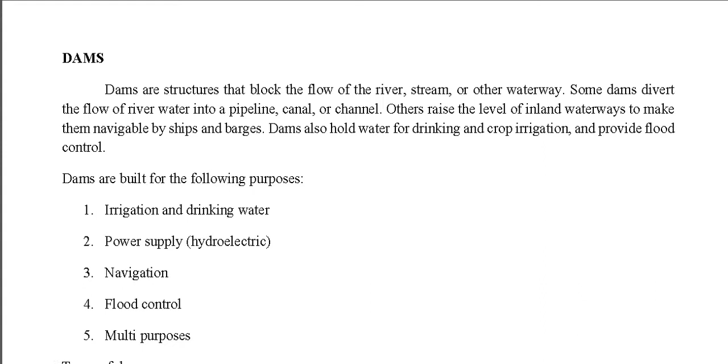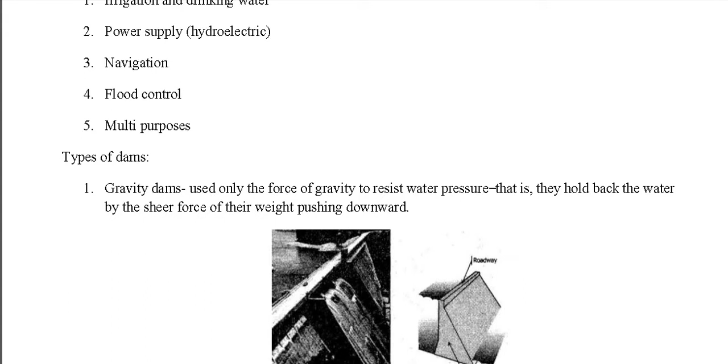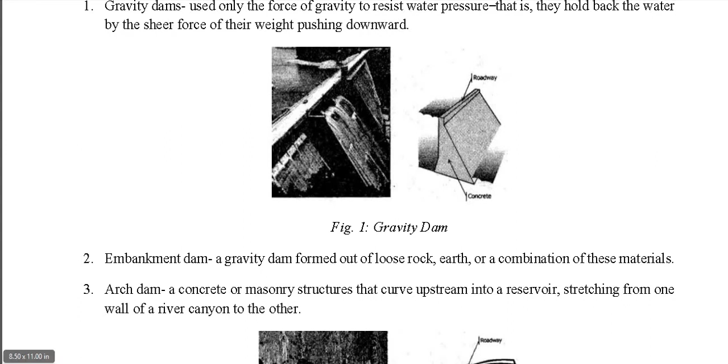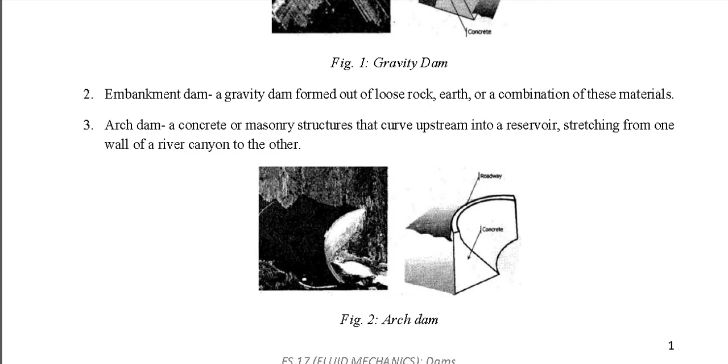So next, let's see these different types of dams. Well, I will not be elaborating more about these types of dams because yung concern lang natin dito is how to analyze problems concerning dams. So in your handouts, or in this video, as you can see, there is the gravity dam, embankment dam, arch dam, at saka yung buttress dam. But in our analysis, we will be dealing more with the analysis of gravity dams, okay?

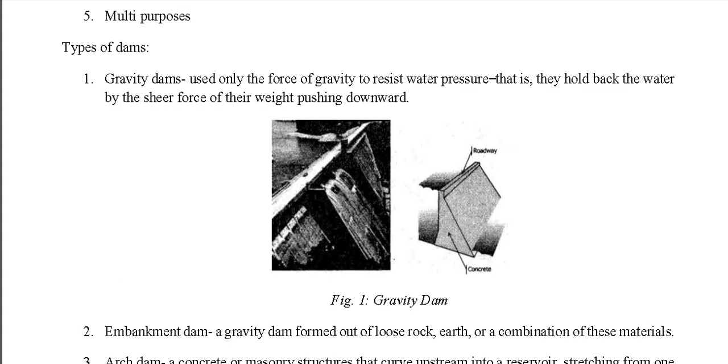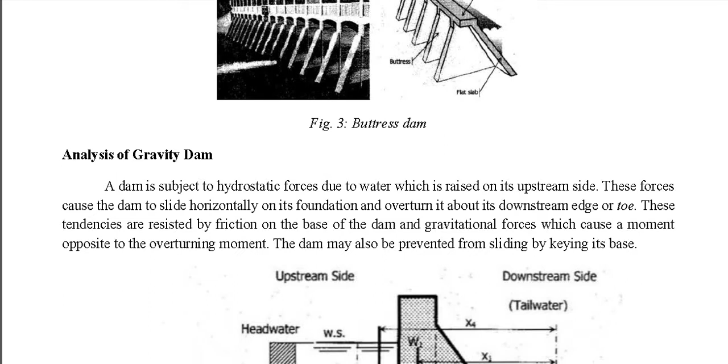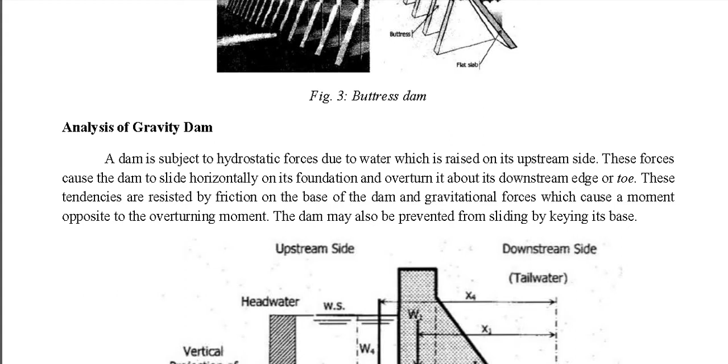So please open the next page of your handout. Here is the analysis of gravity dam. So a dam is subject to hydrostatic forces due to water which is raised on its upstream side. As we all know, dams contain water, right? So when there is water, there is also pressure. That pressure contains the hydrostatic force. So due to that hydrostatic force, water is being raised on its upstream side.

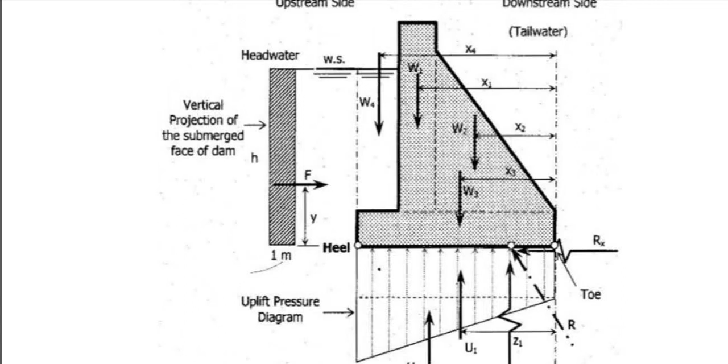As you can see in this sample figure of a dam, please see this cursor, this part is the uplift pressure diagram. Okay? Yan yung tinutukoy dito na upstream side. So these forces cause the dam to slide horizontally. This one is the hydrostatic force. Tapos on its foundation and overturn it about its downstream edge or toe.

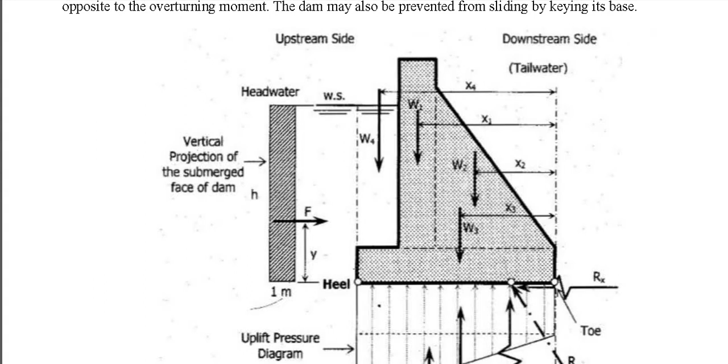So sa isang dam, may tinatawag tayong heel, at saka may tinatawag tayong toe. So as you can see, may dalawang parts yung dam: the heel and the toe. Please see this cursor, itong heel na ito kung saan directed yung water supply, at the same time, yung location ng water. On the other hand, yung toe nandito, sa opposite part. Okay? Please take note of these important parts ng dam because it plays a greater role in the analysis of dam.

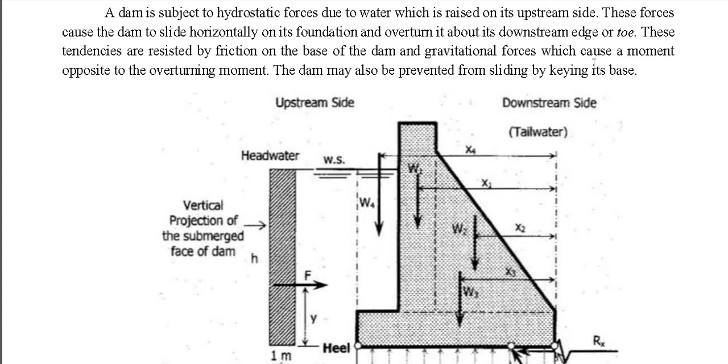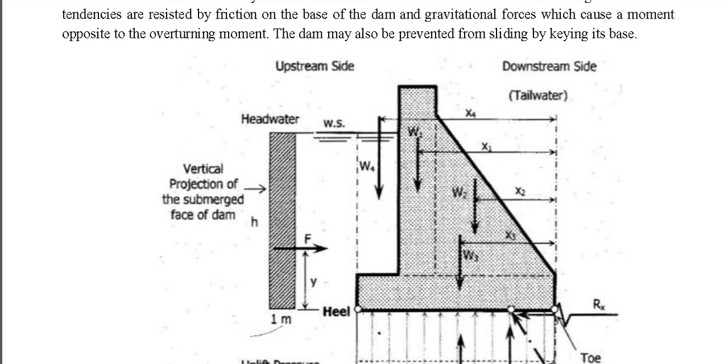So, these tendencies are resisted by friction on the base of the dam and gravitational forces which cause a moment opposite to the overturning moment. The dam may also be prevented from sliding by keying its base. So yun nga, yung pag-slide ng isang dam can be prevented by fixing the base to the ground.

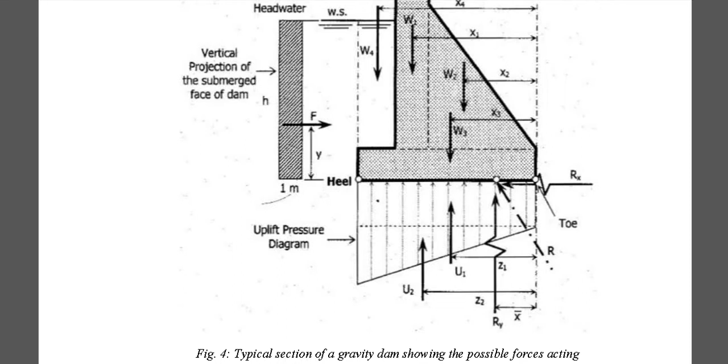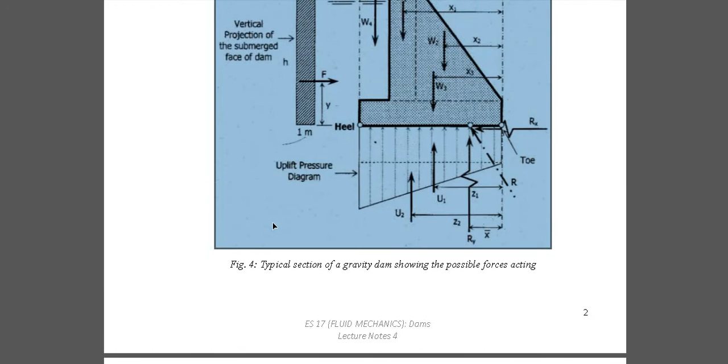So please refer to the figure that I have provided in page number 2 because that will play its part during the analysis of dam. As you can see, may F dito, may 1 meter unit length, and so forth. But to further understand, let's proceed to the steps of solution. So, with reference to figure 4, kaya nga sabi ko kanina, always refer to this figure 4. Kasi yan yung gagamitin natin for the analysis.

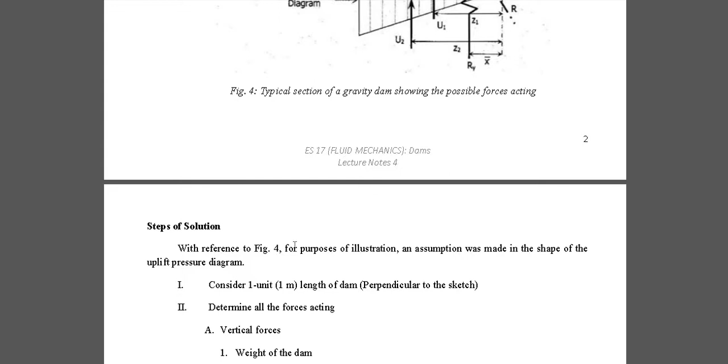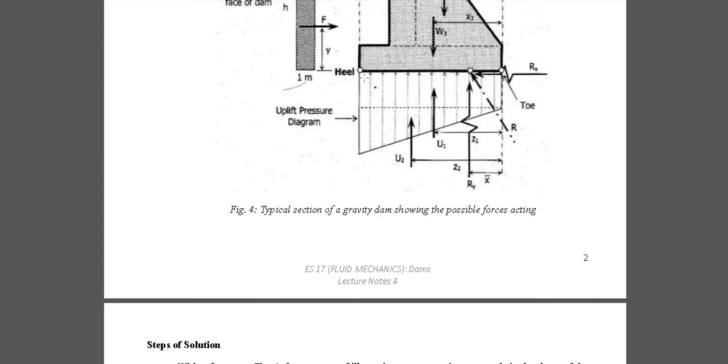So, with reference to figure 4, for purpose of illustration, an assumption was made in the shape of the uplift pressure diagram. Take note, class, sometimes sa isang problem, kung may indicated doon na may uplift pressure diagram, meaning to say, you have to analyze the problem na mayroong uplift pressure. Pero kapag walang indicated na uplift pressure, assume ninyo na walang uplift pressure, okay?

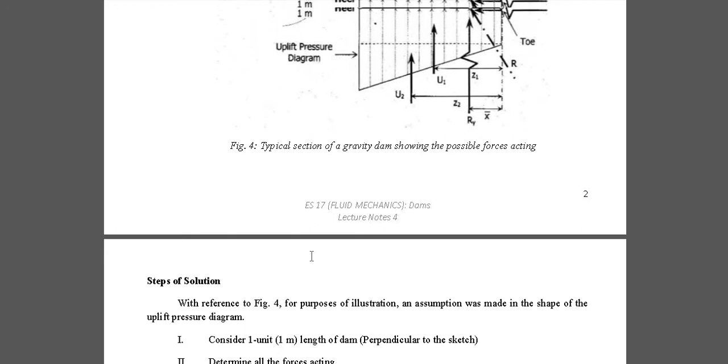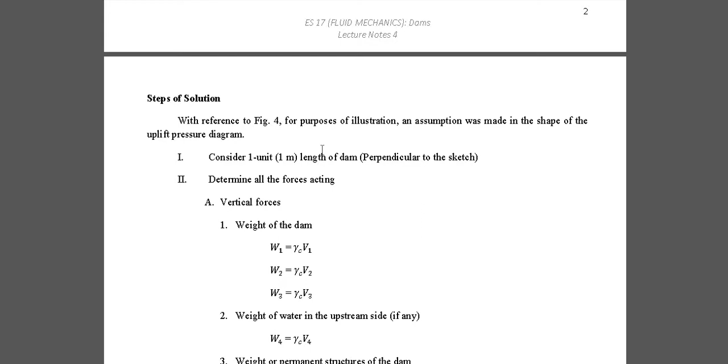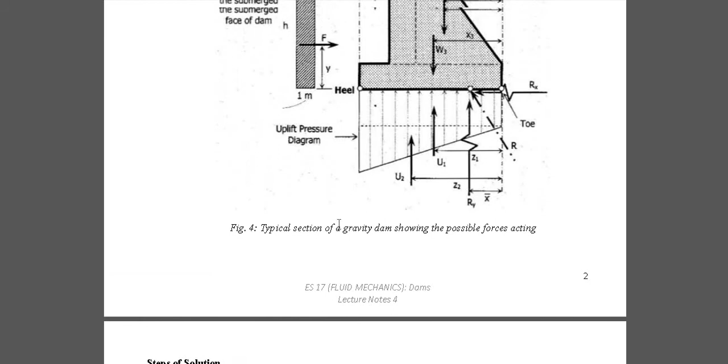So, whenever you are analyzing a problem containing a dam analysis, the following steps must be followed, para mapadali yung solving ninyo. So the first step would be to consider 1 unit, that is 1 meter length of dam perpendicular to the sketch. As you can see in this part, the very first step that you need to do is to assume a 1 meter strip or 1 unit length that is perpendicular to the sketch.

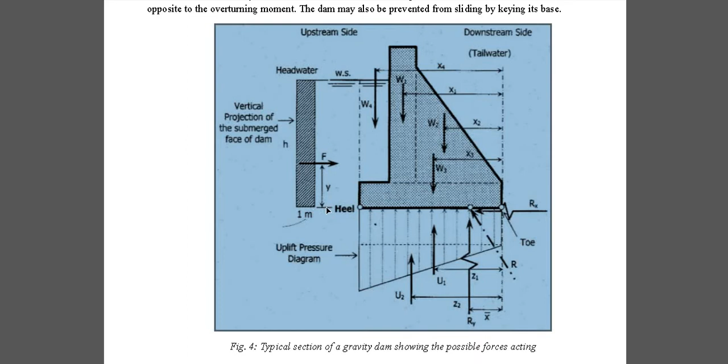As you can see in here, dito, sa dam na ito, this is the side part of the dam. Tapos, kung iproproject natin yung face of the dam, ito siya. Itong 1 meter strip. So, yan yung first step.

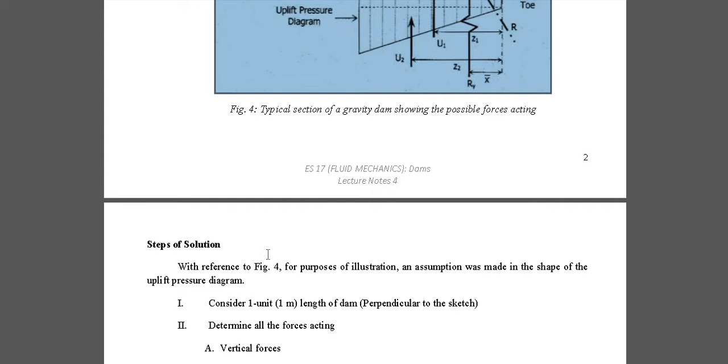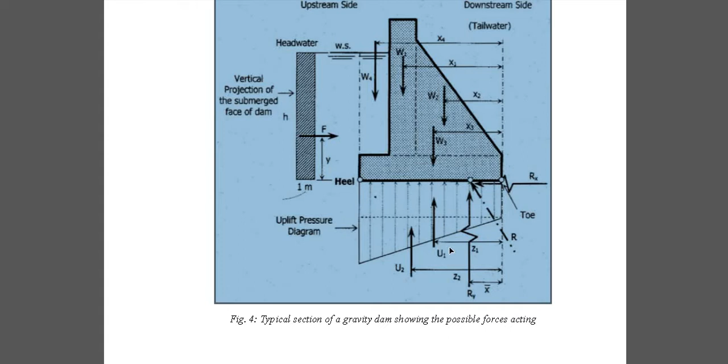Next, determine all the forces acting. After you consider, you assume the 1 unit length of a dam that is perpendicular to the sketch, the next thing that you need to do is to determine all the forces acting. You need to determine the vertical forces. That includes the weight of the water, the weight of the concrete, and saka yung uplift pressure diagram. I mean, uplift forces. After you determine all the vertical forces, you then again have to determine the horizontal forces.

Okay, let's go back sa vertical forces. Ito yung sabi ko kanina, yung weight of the dam, tapos weight of water in the upstream side. Take note, yung weight ng water na gina-consider dito is kung saan mayroong concrete na part. For example, this one, itong dito. This one, di ba may concrete dito? Since may concrete dito, at saka may tubig sa taas, yan lang yung weight ng water na i-consider natin.

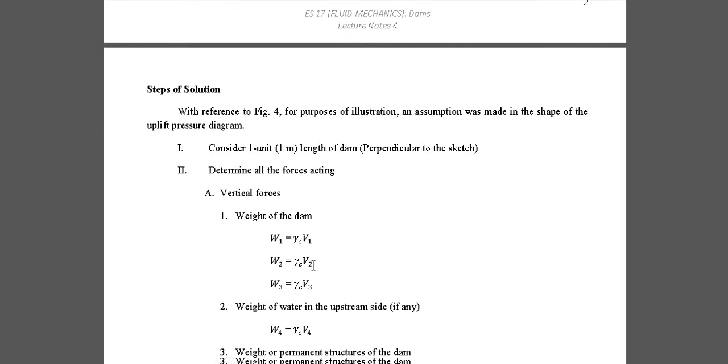Pero question, sir, what if wala tong part na ito? Meaning to say, wala kang weight of water na i-consider. Gets? So next, balik tayo sa vertical forces. Yung vertical forces, kasali na doon yung weight of the dam. Next, weight of water in the upstream side, yung sabi ko kanina. Next is the weight of permanent structures of the dam. And third or fourth, the hydrostatic uplift. Yun yung sabi ko kanina. Kapag walang indicated na solve the hydrostatic uplift, meaning to say, you just have to simply presume na walang hydrostatic uplift yung dam na yun.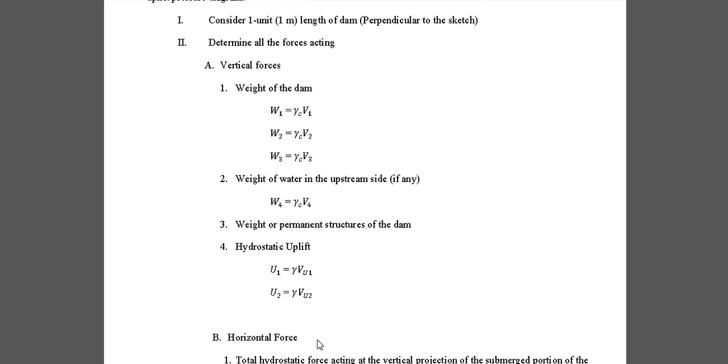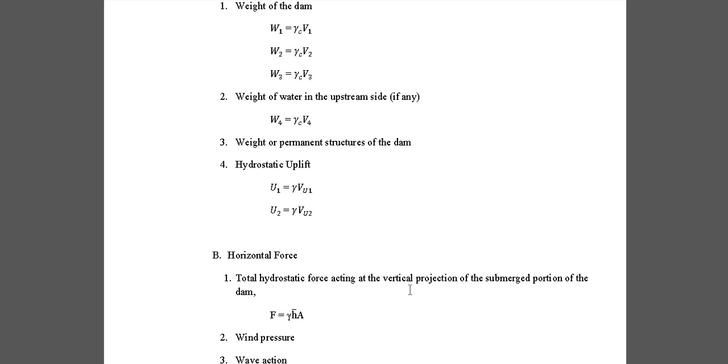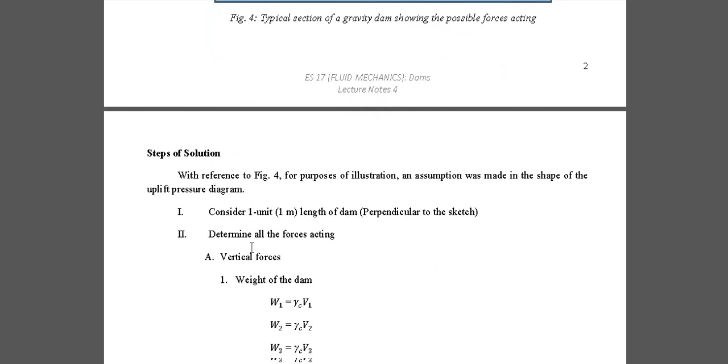So next, let's proceed to the hydrostatic or horizontal forces involved in a dam problem. So the first thing that you need to do is to determine the total hydrostatic force acting at the vertical projection of the submerged portion of the dam. So here, in this figure, sa figure number 4, you also need to determine the horizontal force acting on the face of the dam or the part of the dam in which it is submerged. Kung saan submerged lang. For example, this one. In this height h, sa height h na ito yung submerged na part. Since yan lang yung submerged na part, you have to analyze as well the hydrostatic force, the horizontal force in this submerged area.

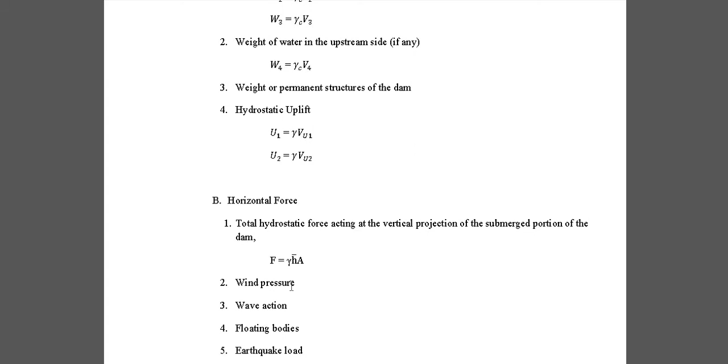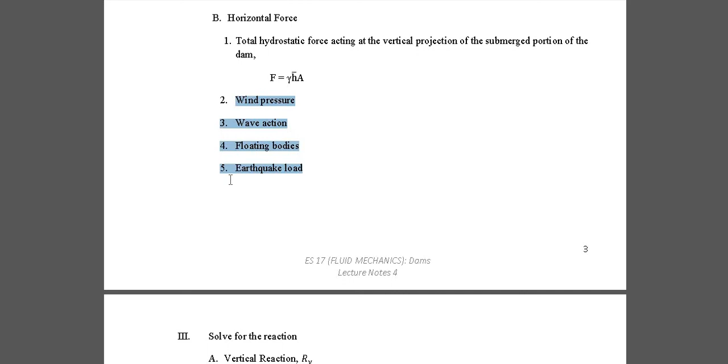Next is the wind pressure if meron man. If may indicated sa problem, you have to solve the wind pressure. Pero kung walang indicating na wind pressure, you don't need to solve the wind pressure. At the same time, yung wave action, yung floating bodies, at saka yung earthquake load. Usually this 2 to 5 is wala yan. Usually ito lang ginasolve na hydrostatic force. I mean horizontal force. The total hydrostatic force acting at the vertical projection of the submerged portion of the dam.

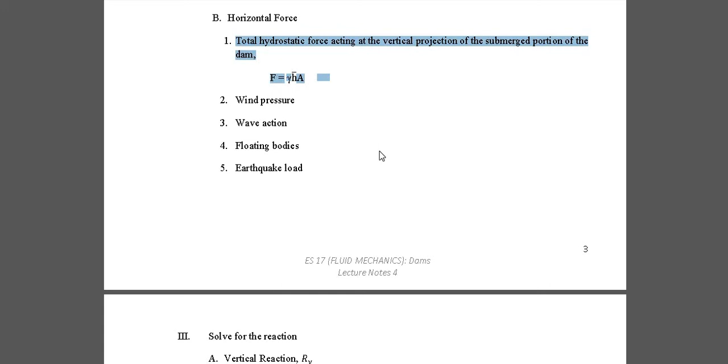After you solve both the vertical at saka yung horizontal forces, the next thing that you need to do is to solve for the reaction. Sa reactions, there contains the vertical reaction at the same time yung horizontal reaction. Sa vertical reaction, yan yung Ry. Sa Ry, or vertical reactions, dyan yung summation of all forces in the vertical axis. Sa vertical axis, nandyan yung W1, yung weight 1, weight 2, weight 3, weight 4. Tapos, ima-minus mo yung uplift forces.

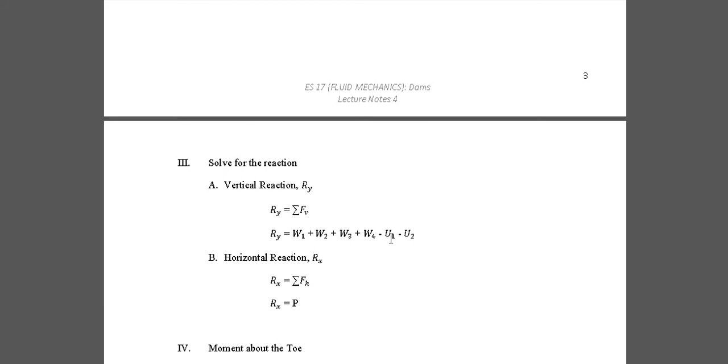Again, tingnan natin yung figure. Sa vertical reactions, nandyan yung weight 1 plus weight 2 plus weight 3 plus weight 4. Yan yung weight ng water. Tapos, if mayroong uplift pressure, ima-minus natin yung uplift force. Okay, gets? Again, minus yung uplift force. For example, itong U1 at saka yung U2. Ima-minus natin sa weight ng concrete at saka yung weight ng water.

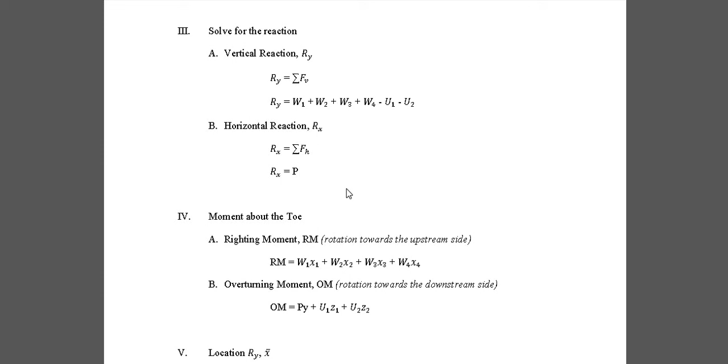After you determine the total vertical reactions, the next thing that you need to do is to identify the horizontal reaction. Sa horizontal reaction, since usually ito lang involved, that is the hydrostatic force or the total hydrostatic force. This one, this part.

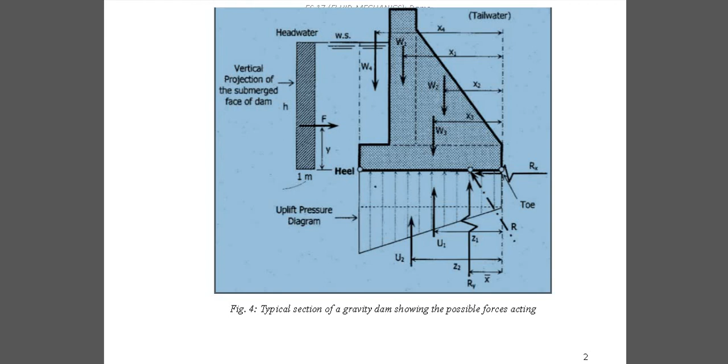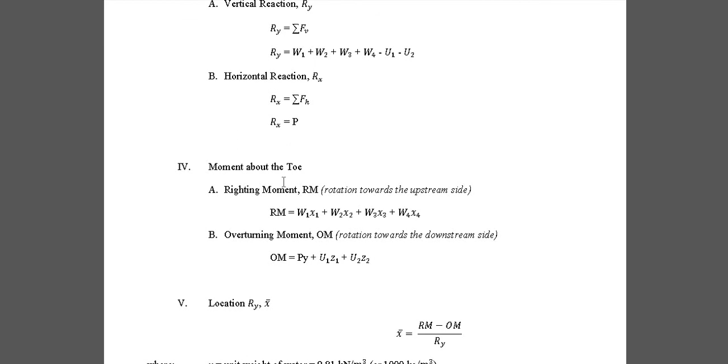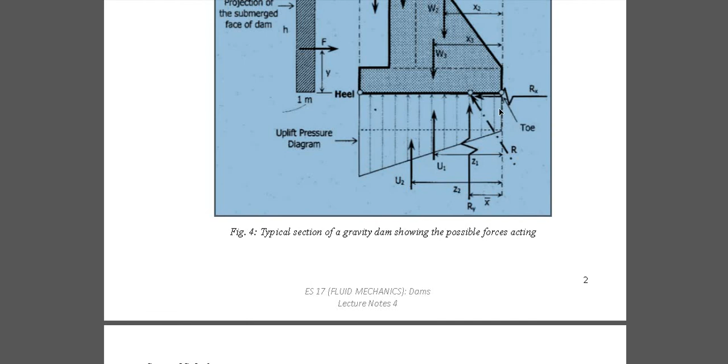So next, after you determine the reactions, both in vertical at horizontal, the next thing that you need to do is to solve the moment about the toe. Again, kaya nga sabi ko kanina, importante yung pag-identify kung saan yung toe at saka yung heel. Kasi, for example, in identifying the moment, the point of reference is always at the point of the toe. That is the toe. So, meaning to say, kung identify natin yung moment, yung reference point natin is yung toe.

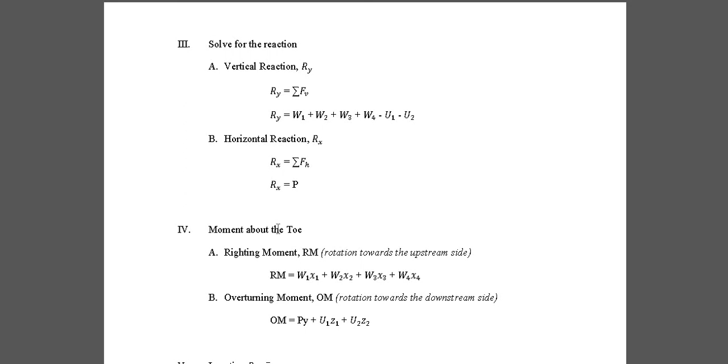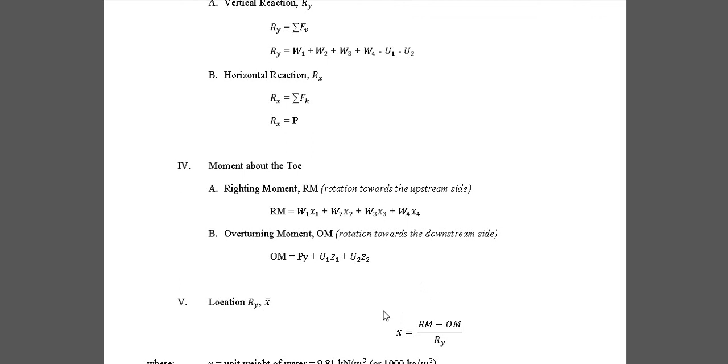Okay? So, moment about the toe, may dalawang parts. That is the righting moment at saka yung overturning moment. So, sa righting moment, it is the rotation towards the upstream side. Righting moment includes the weights of the concrete at saka yung water. Overturning moment, that is the rotation towards the downstream side. Kasali na dyan yung hydrostatic force at the same time yung uplift forces. So, after you identify the moment about the toe, that is the time that you have to locate the Ry. That is the X bar.

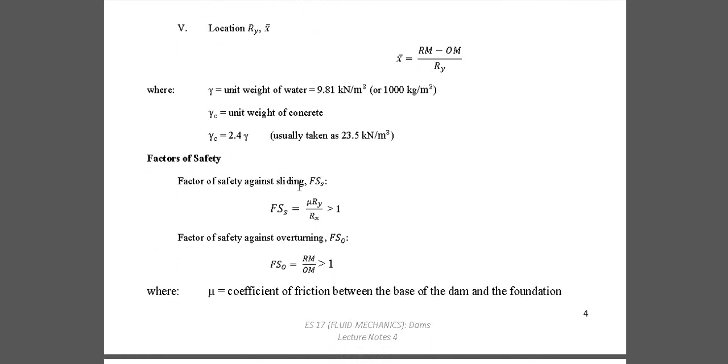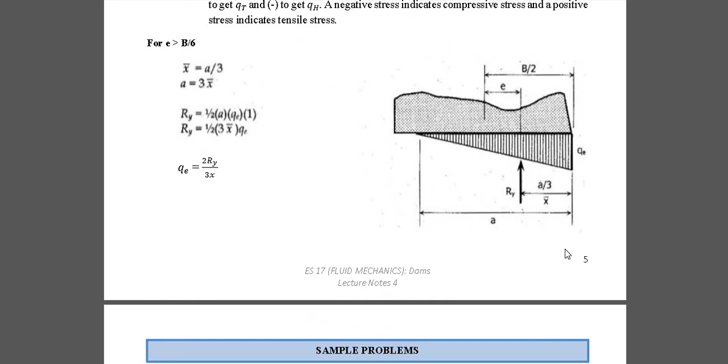Ito yung formula, okay? So, I believe these all are the required steps and the formulas for solving or analyzing a dam problem. So, after this part, I will be providing a sample problem involving a dam problem. So that would be all for the first part of this 4th lecture.